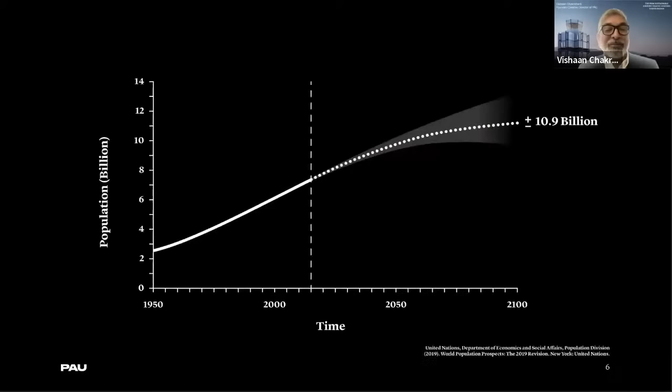And I believe that the way to address all of these things, and I think these towers play a role in this, is the creation of community. Basically, when we create strong communities, we can solve any problem. And when we can do that with a sense of density, even in small towns. So at all scales, we're super interested in community building and how you create communities out of diverse populations.

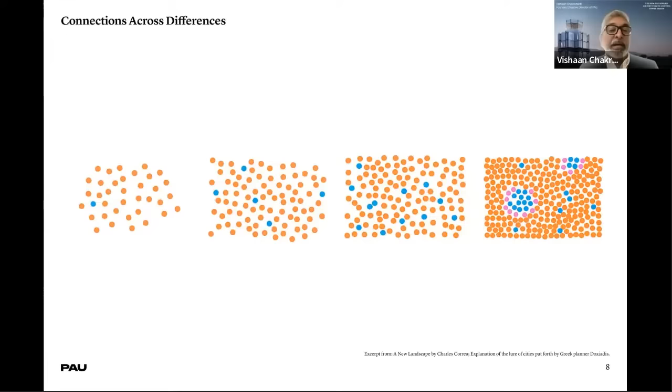And that, to us, is not at all about big cities. One of the things that interested us so much about this competition was that a lot of these towers are going to be built in very small towns across rural America. And we believe that those small towns also need help building community, just like our big cities do.

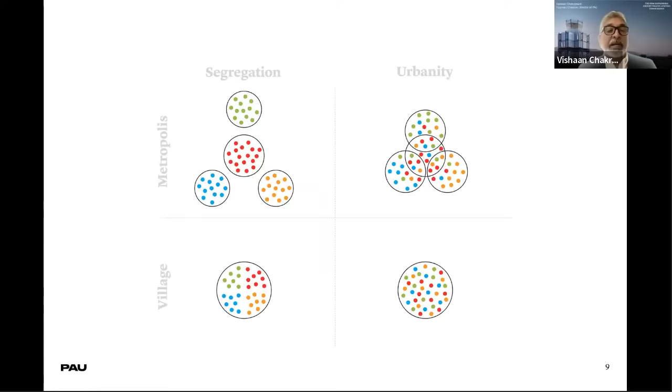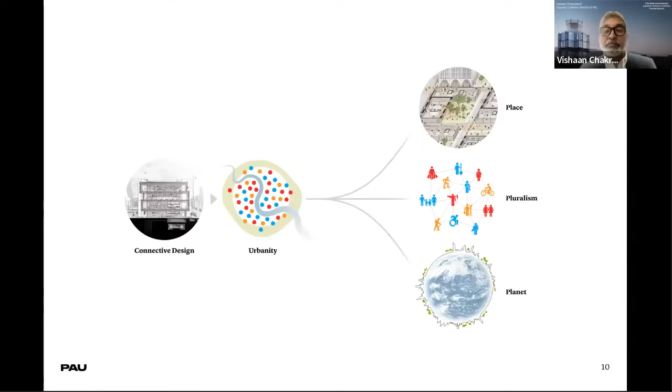And so that's what we try to do. We try to imagine that every piece of architecture is connective. It builds a sense of urbanity, even in a small town. And that helps to build a sense of place and create a sense of pluralism and builds a better planet.

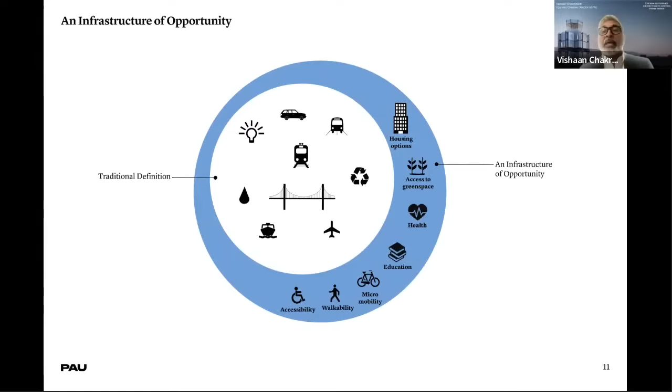And a lot of that in our minds has to do with infrastructure. We think infrastructure is the connective tissue of community. And that means not just traditional infrastructure, but housing and walkability and all of these things. And again, I'm going to explain why this relates to this tower competition in a minute.

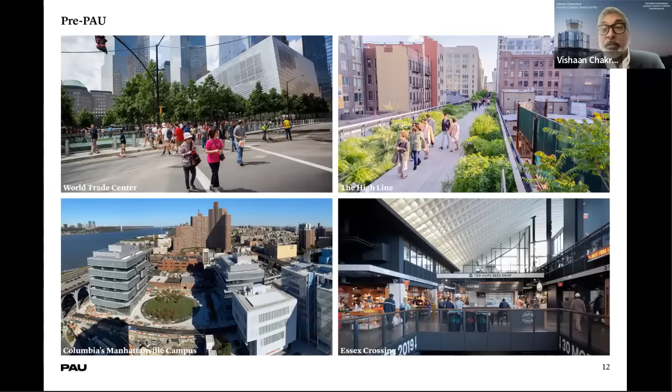So before I started the firm PAU about 8 years ago, I had worked in New York City under Mayor Bloomberg, trying to do community building projects, rebuilding the World Trade Center after the events of 9/11, the High Line. Some of you may have visited some of these, and that's been a lot of my life's work. And I've written about it, and that's our office today. A lot of your FAA team has visited our office in New York. It's a community in its own right.

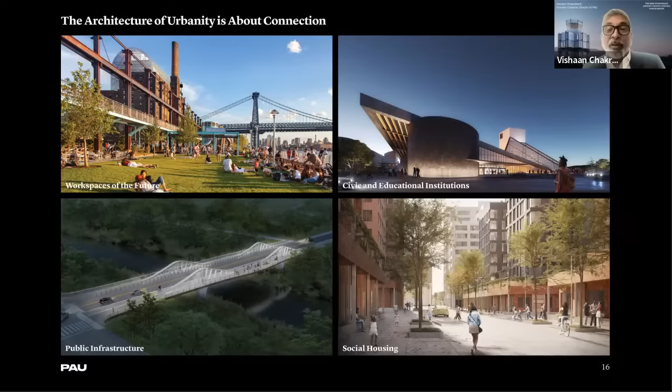And so we came out of the box saying, this is what we wanted to do. We wanted to build humanist architecture and build communities. And so that's what we've been up to, in a lot of different places. We're expanding the Rock and Roll Hall of Fame, which I'll talk about, another I.M. Pei building. Pei comes up again and again in our practice. And we're about to open this pavilion in Columbus, Indiana, which is also about community building. This prize we won, again, in a small rural town in the middle of the country.

And with all of our work, we have a motto that we work with places to understand them. We understand client and community needs. And through that, we create a sense of connection. And by connection, we mean connection in terms of architectural form, materials, technology, climate, and culture.

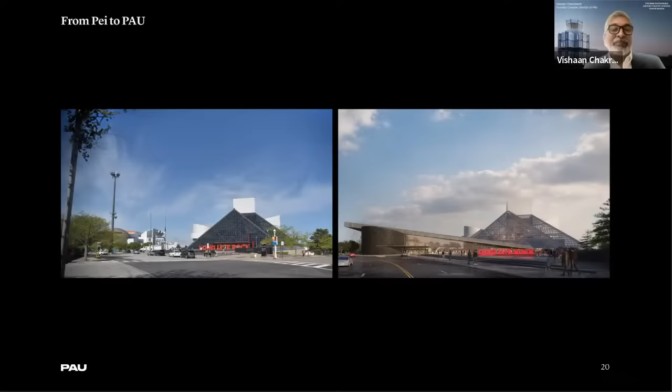And so, again, it's interesting. We won this competition to expand the Rock Hall, which was an I.M. Pei building in Cleveland. And so this thing from Pei to POW has become kind of this funny motto in our office. And so, when this competition came along, we said, we have to enter this because of the legacy of I.M. Pei. I.M. Pei, of course, won, as Jeff was talking about, this competition in 1962. I believe 16 of these towers were built nationwide.

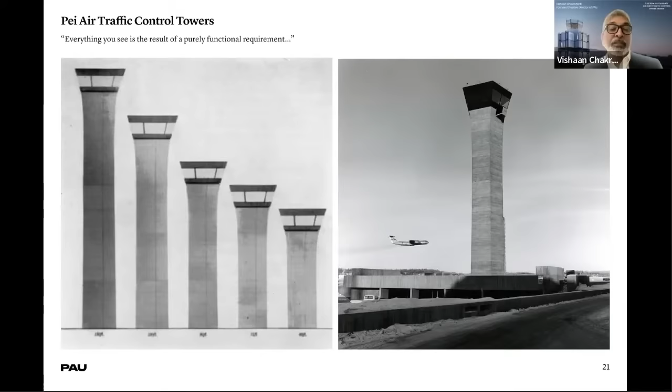And I have this Pei book in my library, and he wrote for this competition that everything you see is the result of a purely functional requirement. And the functional requirements have changed tremendously since those days. People didn't talk about sustainability. Just look at the image on the right, the amount of concrete that was used back then; we try to use more sustainable materials. But the philosophy is the same. We wanted this prototype to really evolve from function. And that was Pei's idea as well.

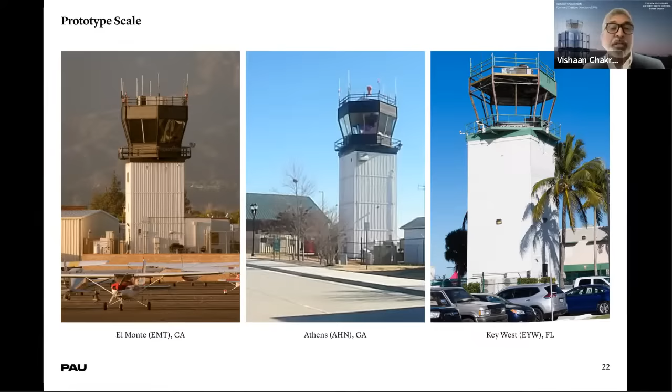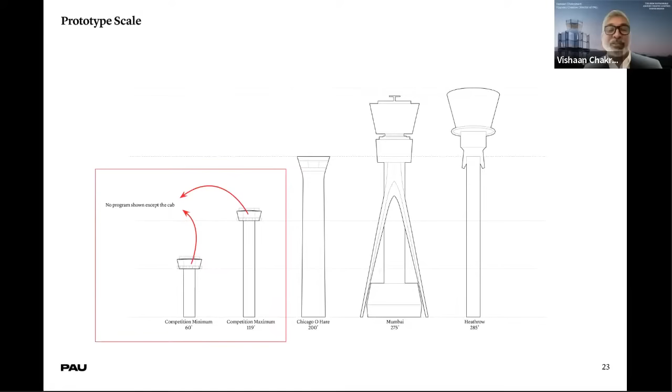The other thing that was really important to us was acknowledging the fact that we weren't building the tall towers in the big airports around the country. These were small, roughly 60 feet to 119 feet towers in small communities all across the country. And we really wanted to acknowledge that and work with that scale. So what's interesting is this is shown as no program except for the cab. And you see Chicago O'Hare, that is a Pei tower actually from that competition, but we're much shorter than those really slender, graceful towers.

So our original proposal, we thought about, I've driven cross country 4 times. It's a beautiful country. And about the expanse of the American plains. One of the famous architects who responded to the plains was Frank Lloyd Wright. His buildings were all about the horizontal. But there's another idea about how you respond to the American landscape, which is the vertical. This is a very famous architect, Bertram Goodhue, who did the Capitol building in Lincoln, Nebraska. And he believed that punctuating the American skyline with these points of verticality was very important in terms of who we were as Americans, that we were ambitious, we aspired towards the skies, right?

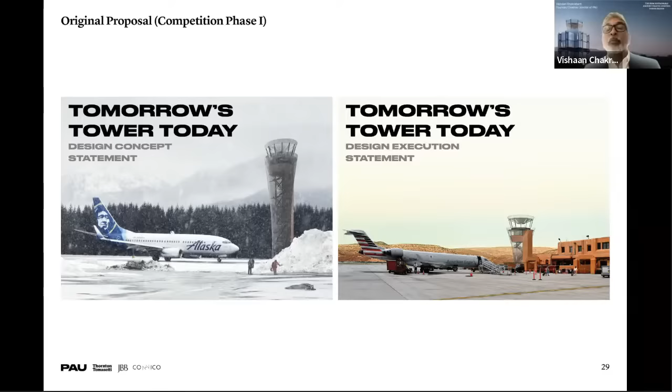And so when we think about these towers, we think about the fact that in many communities, they will be the tallest thing. And so going back to my introduction, we believe these towers help to build community. They help us understand that we all belong to one place. And so it was with that in mind that we did the initial phase 1 competition brief. We obviously had very little program information at that point. We were very focused on sustainability in these initial designs. And we were interested in those more slender forms that you saw in those taller towers.

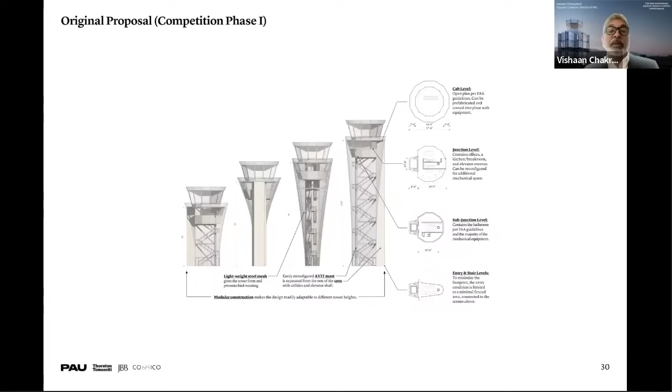But you can see here that we barely understood the program back in phase 1. We were trying our best, and we were, as I said, focused on sustainability and constructability. One of the things that the phase 1 brief had laid out is that we wanted to be able to build this in 10 months.

These were FAA leases on municipal airports. We wanted to be able to do it quickly, and we wanted to use as little embodied energy as possible, so trying to use as little concrete as possible. And so we were very focused on that set of ideas, and Thornton Tomasetti was there with us from the beginning on that.

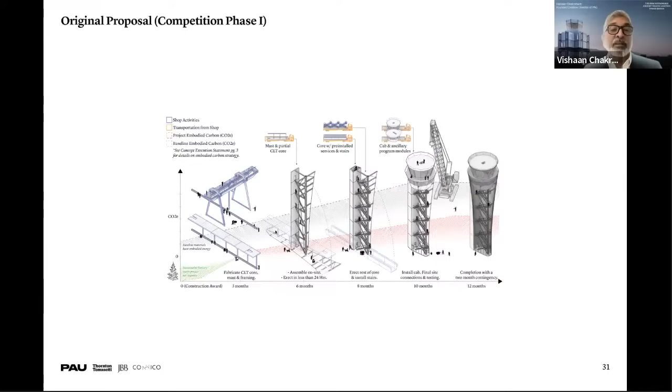But then, as we started to understand that this was going to be a prototype scale that did not have an ancillary base building, like we were just out at the Teterboro Tower, which has a base building, we realized that in many of these airports, we were going to try to incorporate all of the program necessary for the tower in the tower footprint.

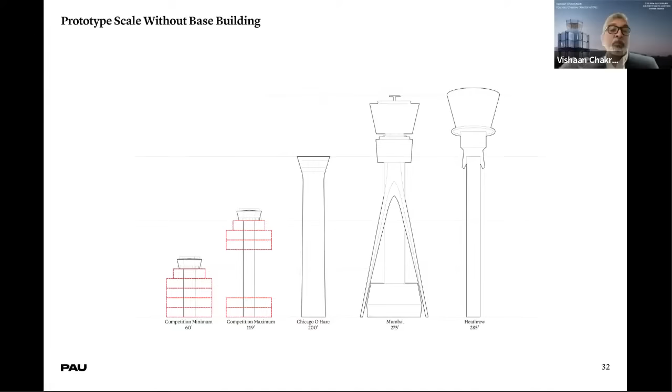And so you can see that in the competition minimum, that 60 feet or 63 feet or whatever that number ends up being actually has to absorb all of the base building program in a more stout form, if you will. And the competition maximum, 119, still has a lot of saddlebags associated with it in terms of its program.

And so that phase 1 idea that we had, all of a sudden we realized by phase 3 that we needed to add a lot of program, both right beneath the cab level and then down at the ground level in terms of mechanical equipment and fire protection and so forth.

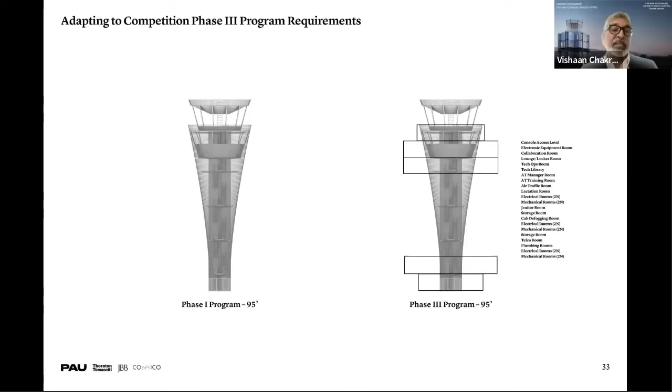So one of the things that we did at this point, and it's a little unusual, is we actually scrapped the original idea. And we said, we have to go back to the drawing board. This is a new program. We have to understand this in a fundamentally different way. And so we started looking at how we could jam that program into the old building. And suddenly we came up with this hourglass form, and it just didn't look right at all to us. It felt like we were just trying to stuff too much into an old envelope.

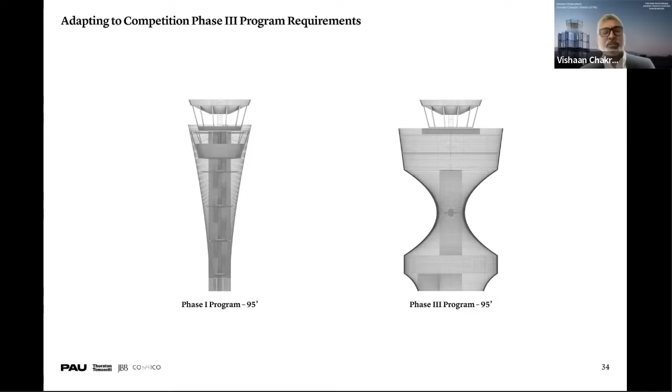And the other thing is, we were very cognizant of the fact that you couldn't just look at the 119-foot tower. You always had to look at the 60-foot tower, the small tower, because the design had to work at the smallest scale. And it had to read as something that people would be proud of in their communities.

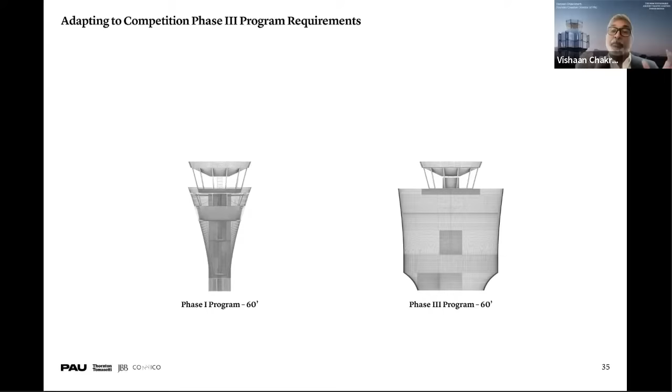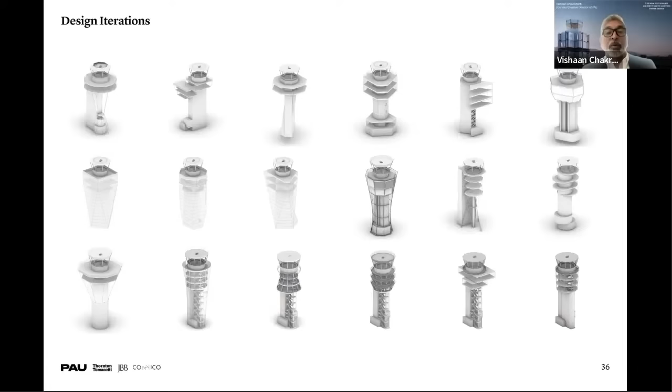And so, like I said, we went back to the drawing board and we did lots and lots of design work and tried to think about how we can incorporate all of this program into this compact height. And like I said, we wanted everything to be driven by function. So one of the things that we promised the FAA during our interview process is that there'd be no added sugar, but there'd be plenty of added flavor, right? So what this was going to be driven by in terms of sustainability, cost, and ease of deployment and construction was the program.

The 2 engineering disciplines that were front and center for us were mechanical engineering and structural engineering. And as I said, that's JB&B on mechanical, Thornton Tomasetti on structural. And the 2 partners from those 2 firms are 2 of my best friends. We consider engineering to be really important to our discipline of architecture. We don't just design something in a vacuum and ask our engineers to figure out how to build it. We really collaborate with them upfront.

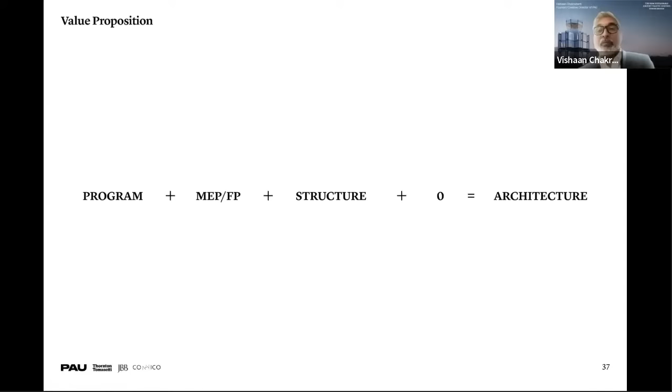And we felt that if we had the program right and MEP and structure right, we didn't have to add anything really; that was the architecture, in that classic form follows function idea. But that doesn't mean that there doesn't have to be beauty. And some of you might have heard this reference that we call it the F4 tower. What F4 stands for is form follows function with flair.

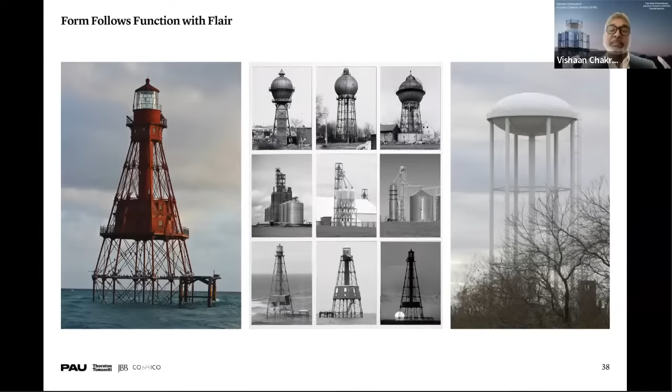And what we mean by that is this set of precedents, which is the water towers and lighthouses you see in communities across the country, where those are the tallest forms. They tend to be industrial. They tend to be stout, but they're really beautiful because they are stripped down to their most elemental engineering facts and needs. And that's where we wanted to start from in terms of a new design.

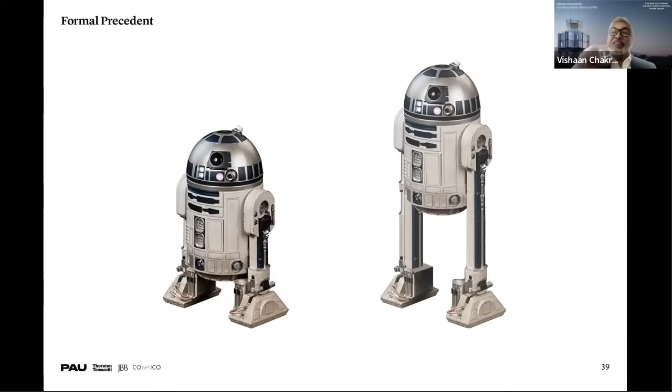And we also had some other precedents here. Famously, R2-D2 from Star Wars had this ability to telescope, so it could go from 60 feet to 119 feet, and that notion that the tower had to telescope across heights.

And so we arrived at this idea of, this is one of my favorite images, and it's the image that we're using for our background right now. And again, this is the shortest tower. And what I always said to our team is, if the design doesn't work for the shortest tower, then it doesn't work, right? Because we have to really acknowledge the fact that in some cases, it's going to be quite a stout object in the landscape.

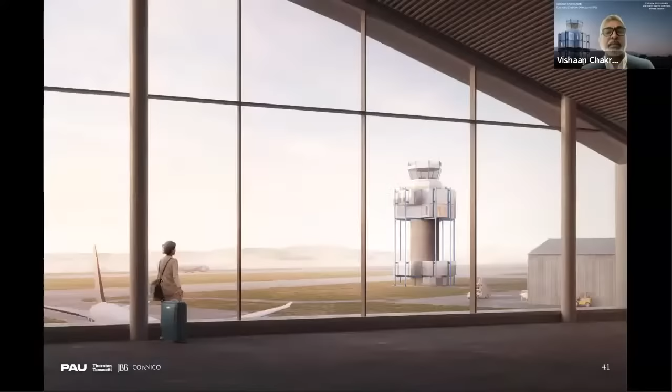But hopefully you see the resonance with those water towers and with those lighthouses that I mentioned earlier, and even little things like the lighting and the cab. Obviously the cab, there's very little design work we can do. It's a standardized cab, but just the small things, the railing details and so forth, that help it really be a beautiful thing in the landscape. And then of course, the fact that it could telescope to that taller height. And this woman is so enthralled with the tower that she's actually decided to cancel her journey and look at the tower for the next couple of days.

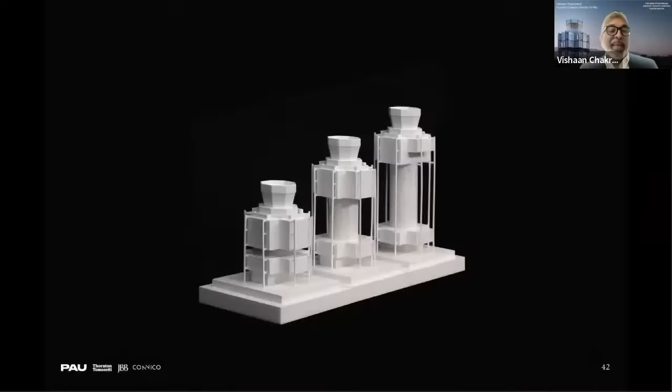So here you have it. And we have this model in our office, this little maquette that shows the tower that can deploy at all of these different heights. And we're going to talk a little bit more about what generates this. We started, I think, with an earlier tower that was at 95 feet. We're still trying to understand which is the first site adapted tower. So right now, as Jeff said, we're working on the prototype, but this was a model for a 95-foot tower.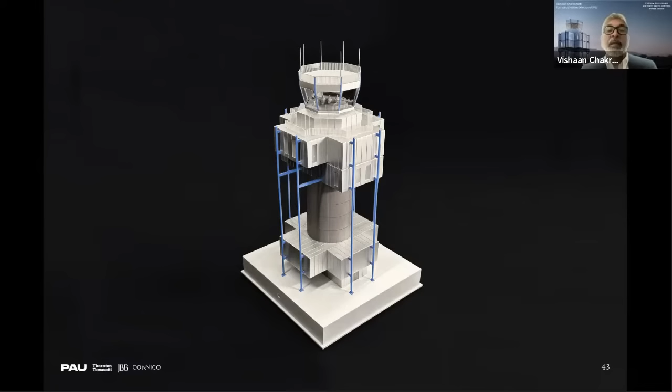And so you'll notice there are some variants that we can use, like color, right? So color on that steel might be different from region to region because it reflects a state color or a state flag or something like that. So we have a little bit of regional variation with these prototypes. So basically, when you look at the building components, they're broken down very, very rigorously in terms of the circulation to get you up to the cab. That includes the stair as well as the elevator, and the elevator obviously can't penetrate the cab. So the cab has the 360-degree view of the airfield.

The structure, which is both a structure on the inside, that is the core, as well as an exoskeleton that is steel on the exterior. So there's both redundancy and the ability to manage loads differently. So if one of those columns gets taken out, the thing still stands. MEP and fire protection, and there's mechanical equipment throughout the tower. And then the main program support for the air traffic control tower, air traffic controllers, obviously closest to the cab.

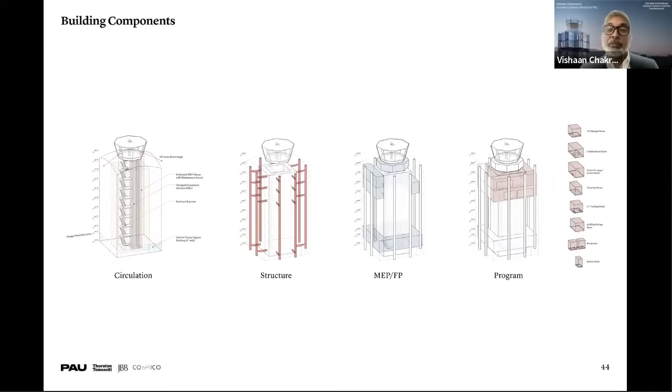And we were, as was said, and we'll talk about this more, very concerned to make sure that that was easily accessible from the cab, had natural light. And we understand that air traffic control is a very stressful job, and wanted to make sure that we provided as much wellness as possible for the controllers. And so that's just an image when it's at that taller height up in the sky.

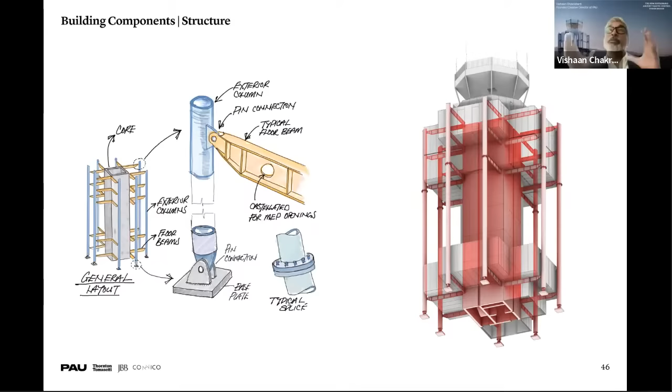And so the structure, we think the structure is very, very beautiful. Again, it's quite industrial. This shows you the exoskeleton, how the exoskeleton is assembled, and even little details like that pin connection and how it sits on the ground, because the exoskeleton is the major thing that's providing it lateral support, while the core is providing the gravity support.

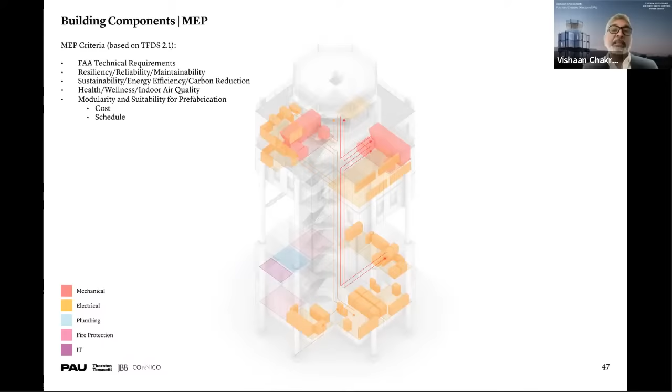And then again, the building, I don't think I need to say a lot about this other than there is a 2N for the mechanical systems, meaning that there's a redundant system for every single system in the tower. So if a system goes out, there's always a backup system. And then things are distributed in terms of whether they want to be closest to the cab or closest to the ground and the points of entry down at the ground.

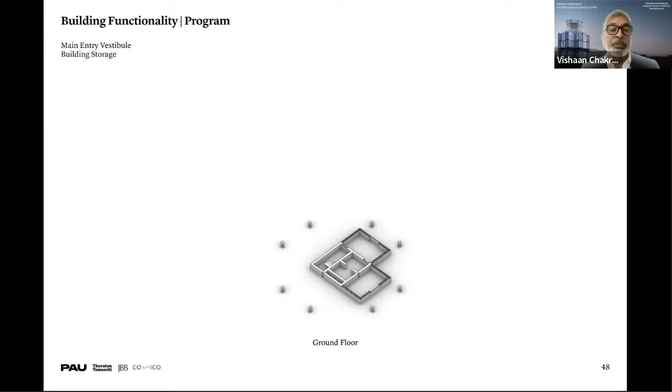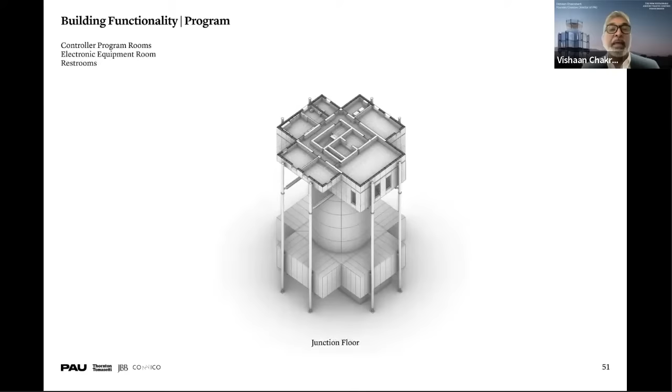And so just building the tower up from the ground, right? So there's a vestibule, there's some storage, and then going up, there's electrical and plumbing. And then up into the upper rooms, you've got some controller program rooms, as well as mechanical and electrical. And then the restrooms as close as possible to the cab at the junction floor. And then going up to the cab access floor.

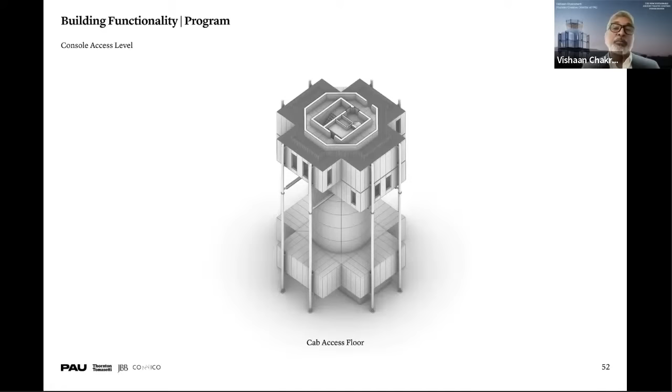This is a really critical floor, as you know, because it's really a Rubik's Cube. It's quite three-dimensional in terms of all the wiring and equipment that has to feed the cab above it. It also absorbs the elevator overrun for the elevator, so that does not intrude into the cab. And then it has that outer railing so that the windows can be cleaned in the cab and so forth. So it's actually quite a critical level.

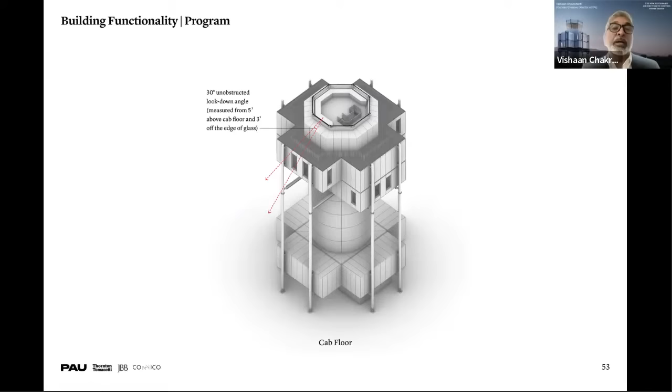And then you get, of course, up into the cab itself with the 30-degree unobstructed look down angle. And that is all quite standardized. And then you get to the roof.

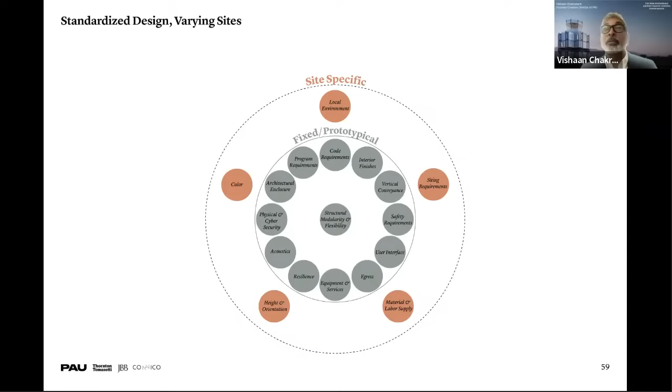And then there's a series of things that are site specific, such as color, height, and then things that are more technical, like material and labor supply and siting, and things associated with the local environment, like seismic, wind, and so forth, that differ from location to location. And so this is just showing you that there are some varying things that can happen. We are trying to use some sustainable materials if possible, such as CLT, if we can reduce the carbon emissions of the construction.

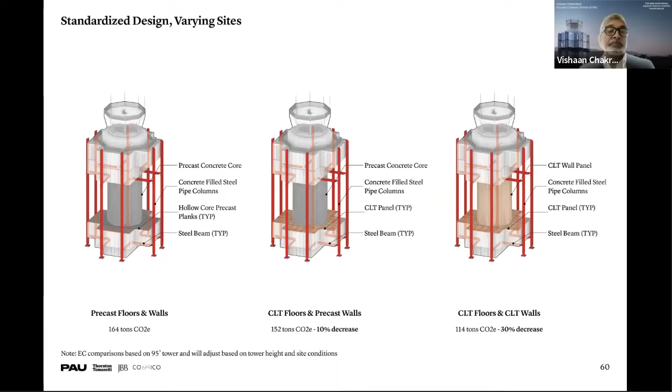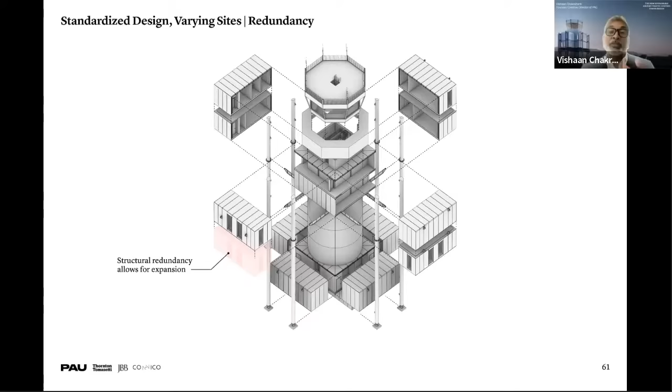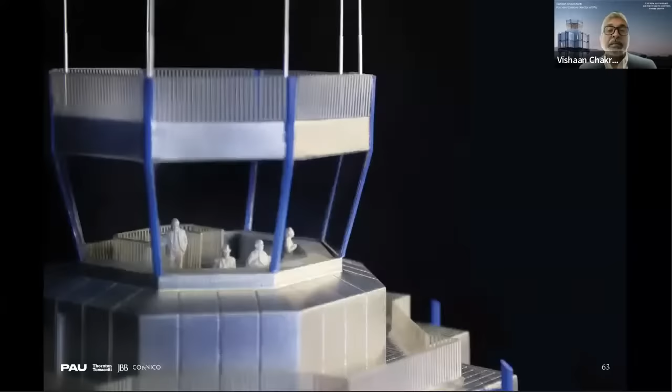And then something to make sure that we understand about this is, unlike that concrete tower that you saw of Pei's, which was very singular and insular and couldn't be adapted, this has a structural redundancy that allows for expansion. So you can add a saddlebag if you need to. So there is a kind of modular kit of parts aspect to it. And I think you can see that more clearly here. And then that just gives you a close-up of the cab.

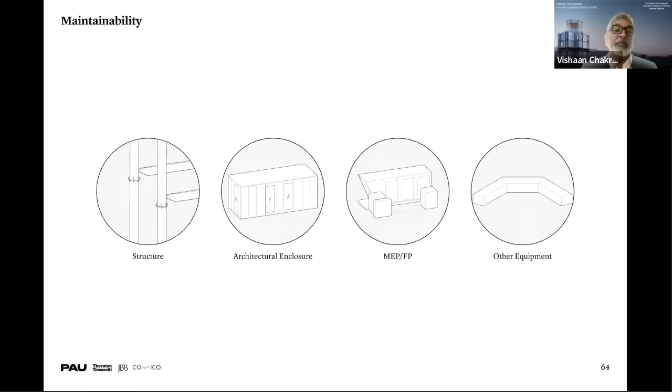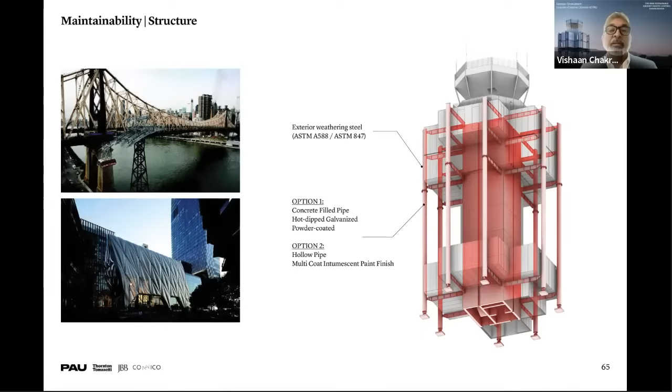Right, and then something that was very important is maintainability, so that over the course of many decades, there's as little maintenance as possible. So things like the structure, the architectural enclosure, which is stainless steel, I'll talk about that, the MEP and other equipment. So the structure is a weathering steel, and there's a couple of different options that you can see there, whether it's an intumescent paint or a powder coated paint that has a very high degree of maintainability.

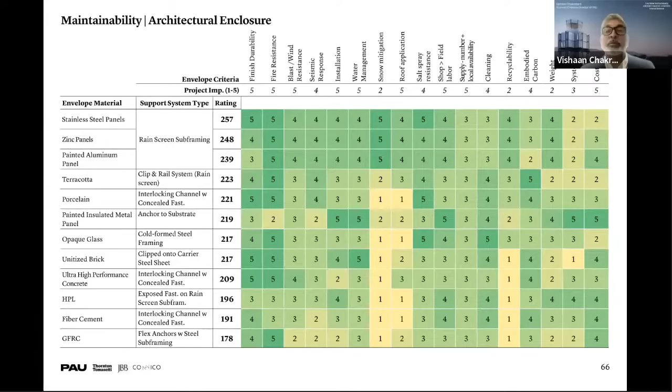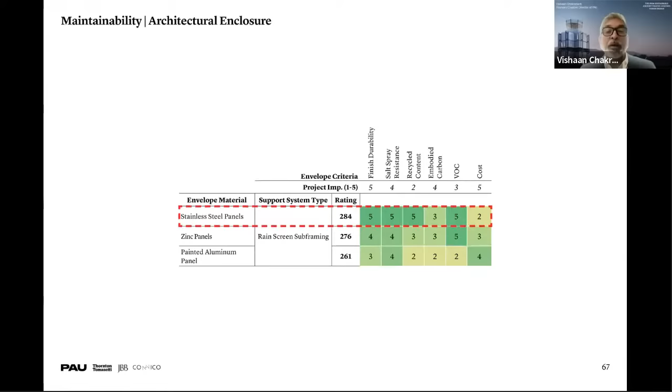And with every single material, so this is a chart we made for the architectural enclosure that explains why we ended up choosing stainless steel as the outer panels, because it had both the maximum durability and the maximum sustainability. Right, and so that's just showing you how we ended up checking those boxes. And then understanding that not all stainless steel is the same, and that certain types of stainless steel are very important to use in more corrosive environments around salt water and so forth.

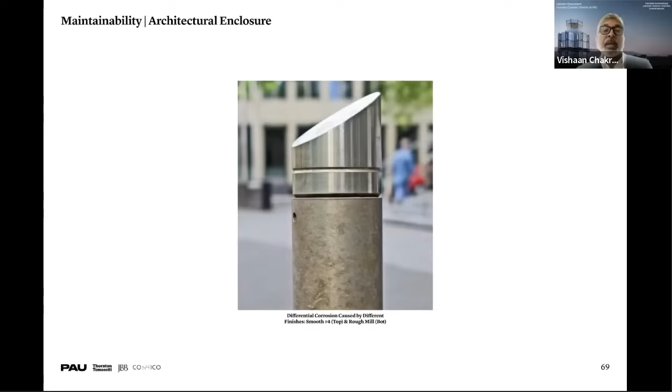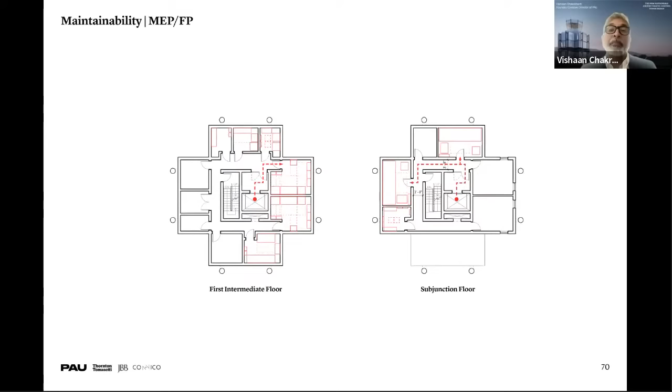And so you can see just the difference between two different stainless steel finishes and how they age differently, and watching for things like this so they don't happen with our towers. And then things like maintainability for the MEP. So all of the equipment can be brought through the building, through the elevator cab, through the existing doorways. So you don't have to get a crane and take off the building skin in order to maintain the mechanical systems. Just another couple of images there.

And then in terms of sustainability, there were a number of things, but there are four main things. It is an all-electric tower. We're very excited about that. We're very excited about the potential to do ground source heating and cooling, or what's known as geothermal. We have looked a great deal at wellness, again, for the air traffic controllers in terms of daylighting and comfort systems, and then a high degree of recycled content.

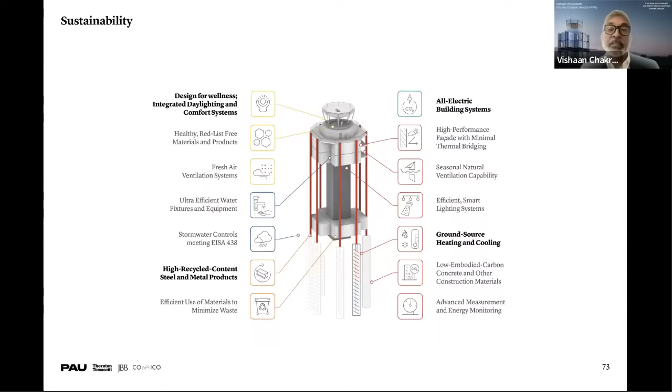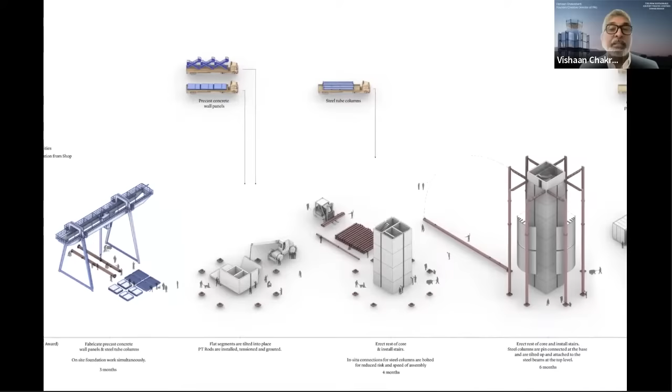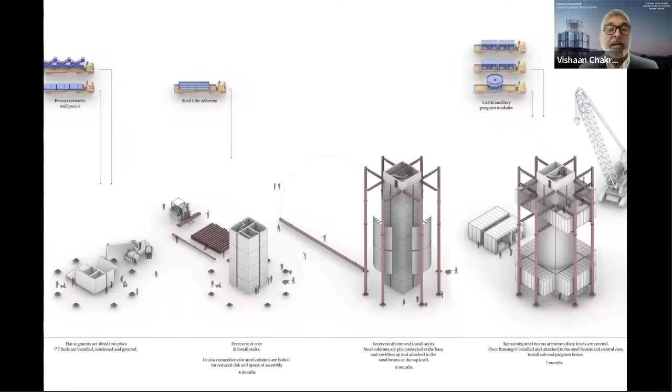But then in addition to those four main ones, I'm not going to go through all of this here, but there's a number of other aspects of sustainability that we focused upon when looking at the design. And then in terms of construction, what you're seeing is the ability to ship most of this in a flat pack and erect it like an erector set on the site, so that this can get done within a 10-month time frame on a number of these sites.

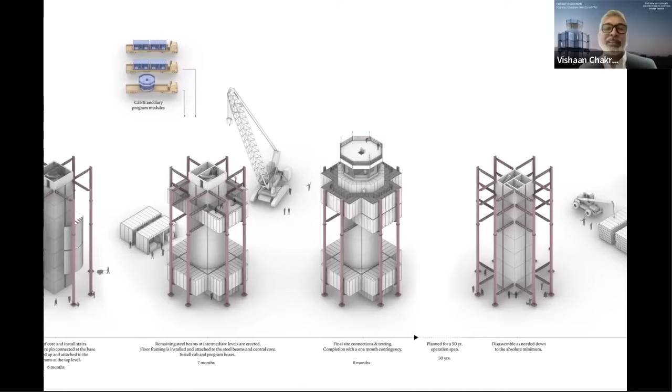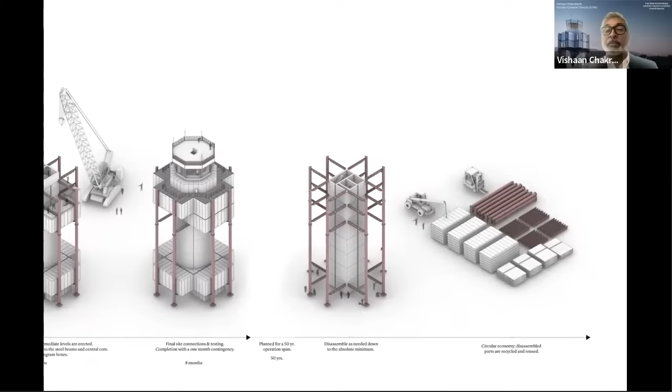And Zane, I think you've got the final words here. I do. Thank you, Vishaan. I appreciate it. And I just realized that you and I on Zoom at least have very similar beards, man. So well done. There you go.

Good afternoon. I'm Zane Edwards. I'm the design and engineering team lead for the facilities group. I want to thank everybody for your time today, your interest in the Tower Design Initiative, and mainly really your patience with us as we've worked through what has been a pretty unorthodox process for our group. We know it's taken a bit of time. I think we're in a good spot now. So thank you for that.

And, as Jeff mentioned, the bipartisan infrastructure law has provided us a tremendous opportunity to address some significant issues we have with our aging infrastructure. But with that, I have to say it comes with some pretty big challenges. And one of the key components to addressing those challenges is the development of what we consider a functional tower design. And the key way we make any design better is through collaboration.